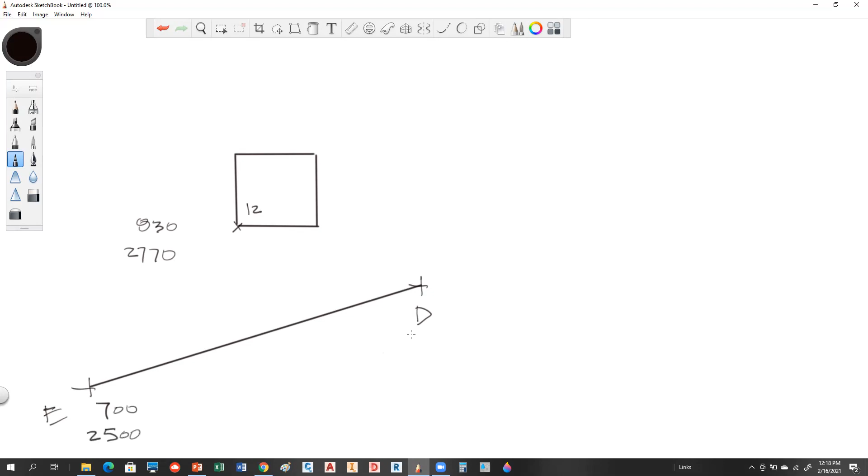And down here, so this is point 12. What we're doing here, this is E and D, this is E, and this is D. So we have 700 northing by 2500 easting, and the D part is 800, 3000. And those are all in terms of northing, easting, northing, easting.

So again, I'm just doing it different than what he's actually showing, but it's the same process, okay? So let's assume we're gonna set up our instrument at E, backsight D, and foresight 12. Like I said, this is not a problem that we're going to have on the test, but this is going through inversing, so it's all good.

It's all good. So what that says, we're going to sit here, we're going to backsight here, and then we're going to turn an angle to E to 12. That's what we need. So we need to inverse that direction. And we also need to know what the information is from E to 12. So we need to get that line also, so we're going to need to inverse that.

So what we would do is first get our backsight. So I would need the latitude from E to D. So that would be the northing of D minus the northing of E. So remember, you're just flipping those, okay? So let's see what we come up with. You guys can calculate it with me. I'm not going to write all that down, but D is 800 and E is 700. So that gives us a positive 100.

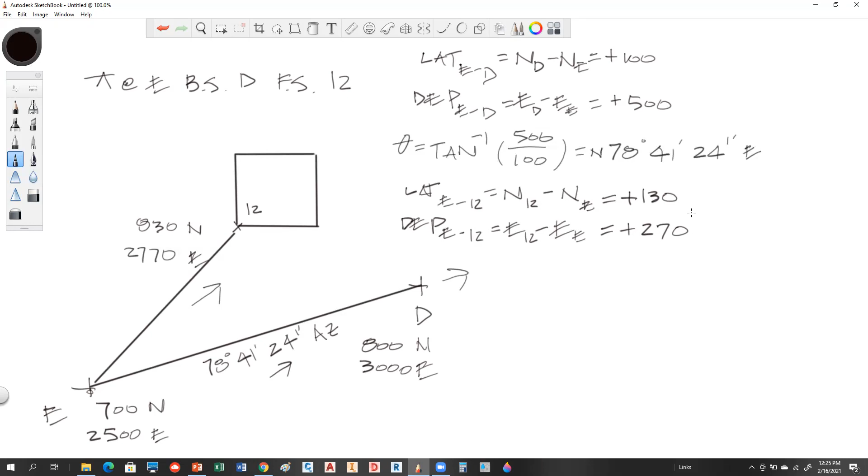Let me just mention something too here. It's not a big deal, but most people in the real world don't use A, B, C's, and D's for their control points, because you're going to run out of control points real quick. You only have 26 letters. So most people use numbers, just so you know.

You would see that. All right, so the inverse tangent direction on this would be an arc tangent of the departure, 270, over the latitude. Now, as you look at this, if north is up, which we're assuming, this bearing has to be less than that bearing because it's going to be closer to north. So if you don't have that right, think about that, because if you flip those numbers, it could be different. Okay, so I'm getting, let's see what I'm getting here, 270.

All right, I'm getting 64 degrees, 17, and it's also 24 seconds. Anybody agreeing with that? Yes. Okay. Now notice what I just said. This number has to be less than this, because again, if we look at north, the angle here is going to be less than the angle to there. So that does make sense. And in terms of an azimuth, this is also the same number, 64 degrees, 17 minutes, and 24 seconds azimuth.

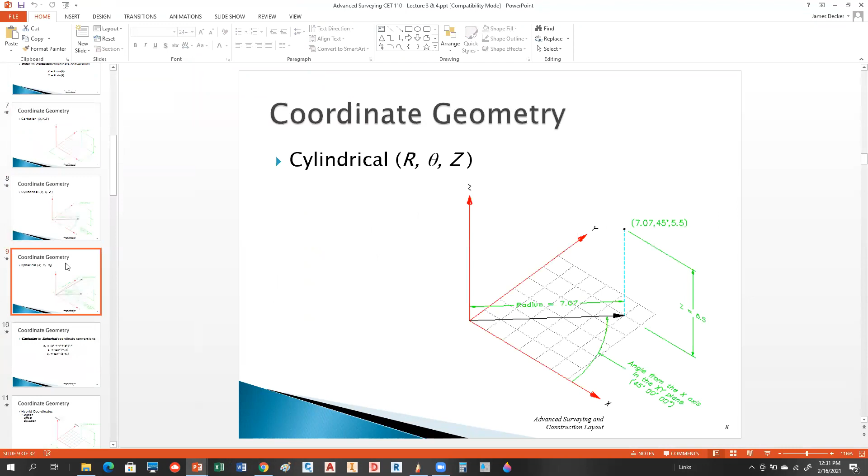Okay. Well, one thing, remember the steps that are involved in any traverse calculation. Let me fire this up real quick. Let's look at some PowerPoint stuff real quick. Maybe that'll answer a question for you. Because I'm not trying to not answer that, but like I said, we went through that on Thursday. So let's see. Give me a sec here. Gotta find it. Okay, so the biggest thing with traverses, maybe it's not in this section. Might have the wrong PowerPoint. Let me grab another one.

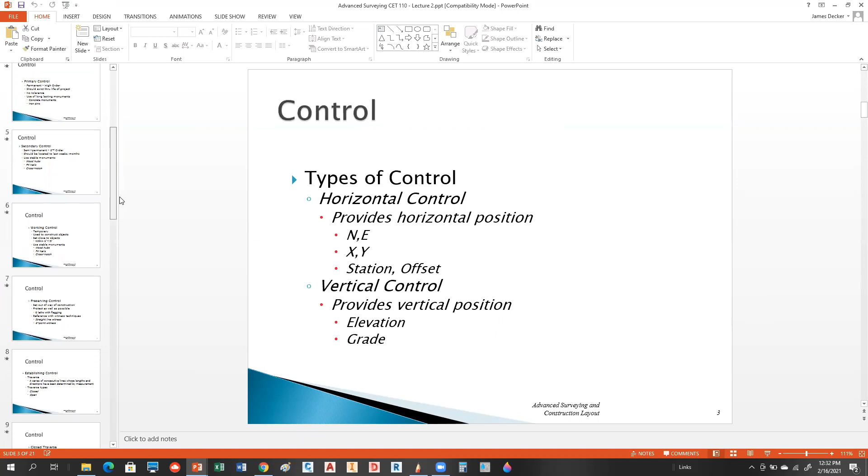Okay, so this one, the biggest thing with traverse closures, just remember the steps, okay? Because the steps really kind of guide you through, and you can use these as handouts. You might want to print this stuff out to have it, particularly this piece right here. So this is showing you the typical steps that you go through in a traverse calculation.

Now I might not give you a traverse where you have to do steps 1, 2, 3, 4, 5, 6. I might bring you in right here and say, okay, I've already done all of this up here. Calculate latitudes and departures and go on. So do keep that in mind. You want to have these steps available to you and know what each step is and what it's referring to, but it may not go from start to finish.

So in a traditional traverse, like the control that we're going to be laying out next week, we would do all of this. We'll balance the angles first, calculate directions, either in azimuth or bearing, calculate latitudes and departures, determine linear misclosure and relative precision, adjust the traverse, and adjust or calculate coordinates. Remember we've got the angle balancing, and some of you didn't do very well on that quiz, so make sure you know how to add angles, because that was probably half the battle.

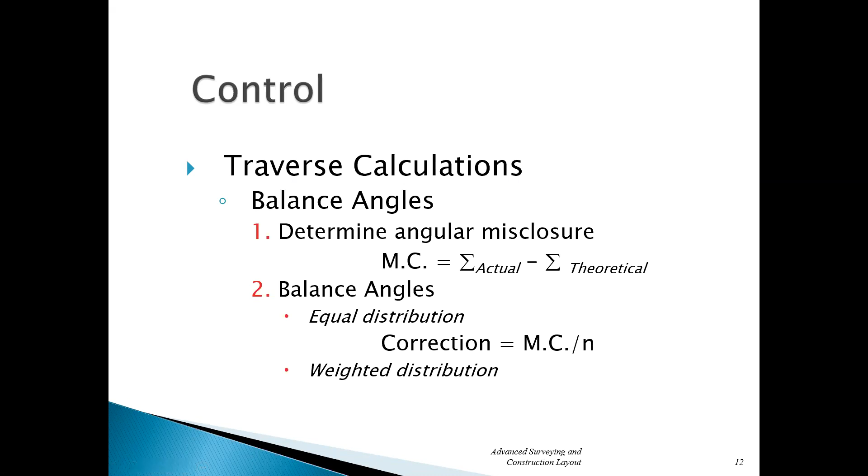And we're going to do an equal distribution. So that's what I said. If you're going to get a misclosure from me on this test, it's going to be something that's going to give you a nice equal number, 2 or 3, 4, whatever. Okay. So that's your first step. Second step, of course, is to calculate traverse directions using azimuths or bearings. So you would be given some initial direction, and then you would have to go with that.

So again, I may have a problem out there that you're just doing something like that very simply. It's probably not going to be a traverse start to finish, and I'll tell you why. Because if you blow one aspect in the beginning, the whole problem's wrong. First time I taught this class, way back when, I did that in a traverse from start to finish, and half the guys couldn't calculate bearings. So, you know, at that point, the whole problem was wrong. So just be focused on that. I'm going to bring you in at different points within the traverse process.

Hopefully at this point, everybody knows how to do bearing and azimuth calculations. Does anybody need to see anything relevant to that? Because I would certainly go over that if there's any issues. We're okay? Yeah, I'm good. And if you choose and you want to use azimuths, you can, unless it's specifically stated, hey, you have to use a bearing. Because remember, the azimuths very, very often are going to make your work a little bit simpler to deal with. But again, that's up to you, unless I specifically say I need this or this in that format, okay?

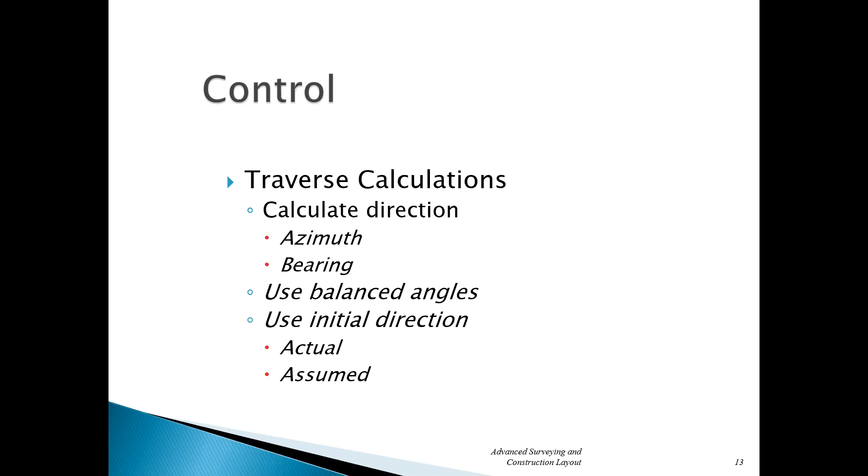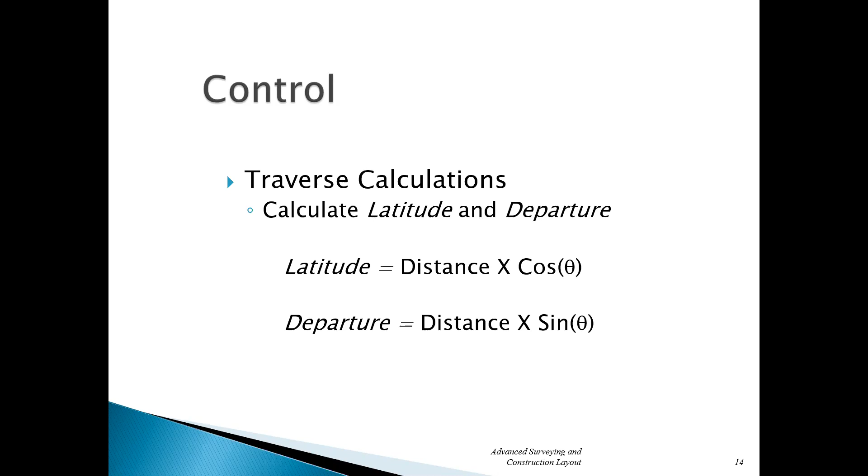So the next step is to do latitudes and departures. So this is the process where you have a known distance and you have a known direction. So in this case, where we're using these equations, remember, latitude is always a cosine relationship. Departure is always a sine. If you flip these guys, you're going to have problems. I haven't seen too much of that going on by anybody right now, but hopefully I won't see it on the test, okay? But remember, this angle, theta, can either be expressed as the bearing angle or the azimuth angle.

You're going to get the right latitude and departure using either one, but the difference is, I think we all know at this point, when you're using a bearing angle, that bearing angle is only going to give you a positive result for your latitude and departure. So at that point, you're going to have to apply the sign based on the quadrant that bearing exists in. The advantage to the azimuth, of course, is that your calculator will calculate it properly, and you will get a proper positive or negative sign based on what the azimuth angle is. So again, just think about that.

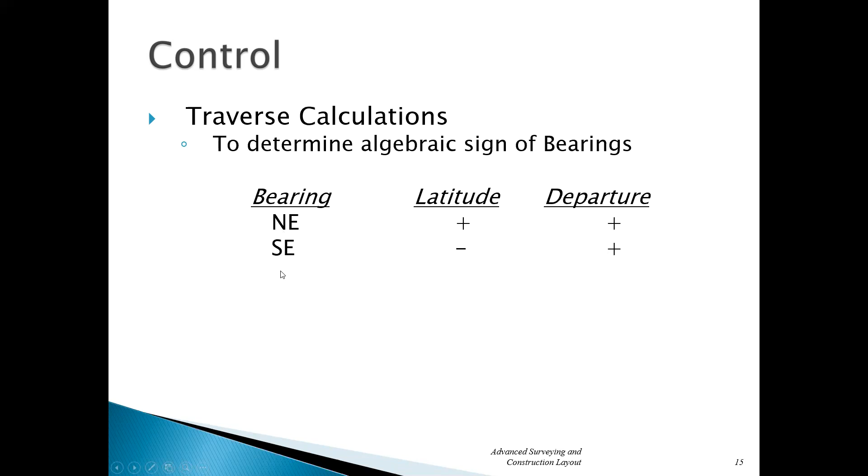If you're using bearings, this is that little chart. Remember, northeast is positive, positive. Southeast would be a negative latitude, positive departure. So again, we're just saying that north and south is positive, negative respectively. And then the same thing with departure is east and west. You have west is negative and east is positive.

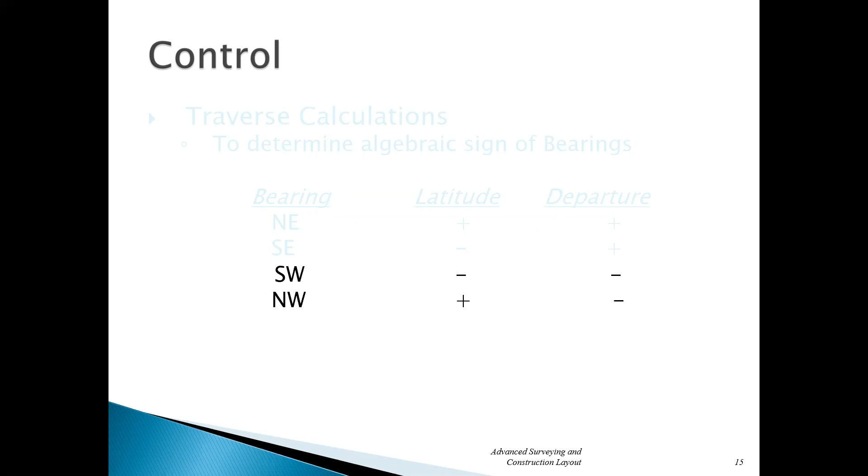All right, so once you do that, this is the next step, calculating linear misclosure and relative precision. So we sum our latitudes, we sum our departures, we do that algebraically, and that's going to give you your error in latitudes, error in departures. And remember, when you do this, if you come up with a really large number, that's also going to be a mistake. Now, I'm going to probably give you something that you can see, that you can adjust, but it's not going to be 5 feet. So if you get something like 5 feet or even 1 foot, you're probably going to be wrong. You need to recheck stuff, okay? But I'm going to give you something. It's not going to be like 0.01 because that's not going to be enough to distribute, okay?

And also make sure that you follow the sign, because the signs are critical when it comes to doing the adjustment itself. So when you sum them up, make sure you're doing it algebraically, okay? Linear misclosure, your error of closure, either way, we express it as the error in latitude squared plus the error in departure squared, square root. So again, you're just using that Pythagorean theorem relationship.

The bearing direction of the error is less critical, okay? But what we've talked about quite a bit, and what you'll find is pretty true, is if the traverse tends to be longer in a north-south direction, you're probably going to have a bearing that's going to be between 0 and 45 degrees, okay? Because it's going to be closer to north. If your traverse tends to be longer in an east-west direction, you're going to have a bearing angle that's going to be between 45 and 90.

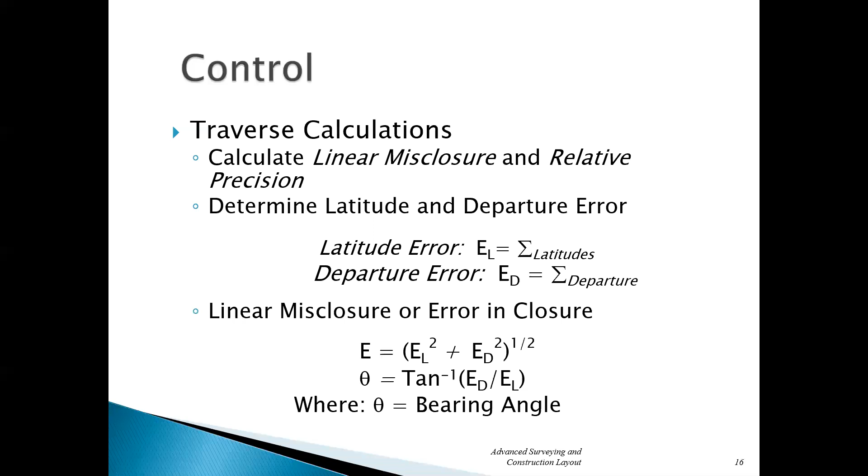So it's showing you which direction it is, and it should make sense because you're traveling longer in one direction than the other. So the error tends to follow with that. And again, it doesn't always work that way, but majority of the time it does, all right? So with this, once we have E, which is the critical component here, then we go and do what's called the relative precision. So remember, that's really defined as your error of closure divided by your perimeter, which if you do that, you get that small number. So you just flip it, 1 over x, or you can just divide perimeter by E.

But what that relates to you is the amount of precision as number 1 in something. So we would say this is a 1 in 16,385. A lot of people would just round that to 16,000, or might call it 16,400. But remember, what this is specifically saying is that for every 16,400 units we travel, we can expect 1 unit plus or minus of error associated with that. And so hopefully everybody realizes that this is not a good precision right here. In fact, it would fail probably in all counts.

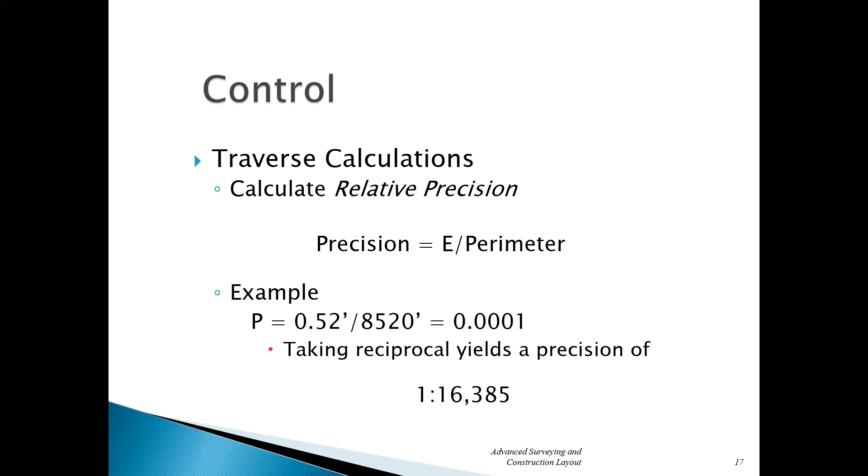I do think state of Ohio in urban surveys is 1 in 20,000. I think rural surveys, farmland, they actually let 1 in 10,000, just because you've got more open ground and everything. So this might be acceptable back in the day, but I wouldn't call this an acceptable precision for any purpose. Okay, so the next thing was the adjustment.

So we talked about 4 rules. We've only considered 1. So you don't need to know anything about the other ones. In fact, I didn't talk about anything other than the transit rule. And what I did relate to you is that the transit rule assumes that you're measuring your angles with a better accuracy than you are your distances. So when you adjust a traverse with a transit rule adjustment, it puts more correction into the distance component, and it keeps the angle pretty much the same.

So the compass rule, what does the compass rule assume? Anybody know? So we said the transit rule assumes that the angles are better than the distances. What's the compass rule doing? Nobody knows? It pretty much assumes that the distances and the angles were pretty much measured with an equal type of accuracy. So in other words, there's nothing better. They're basically the same.

That's pretty standard measurement by today's instrumentation. So when you're using a total station that's a 1-second instrument and an EDM that's built inside of that, you're getting good distances and you're getting good angles, and they're pretty equal. So what the compass rule will do is it actually adjusts both components. So it tweaks the distance a little bit and it tweaks the angle a little bit, and they're pretty much equal. Both things will change though. What you'll find is both will have a little bit of an adjustment placed in them.

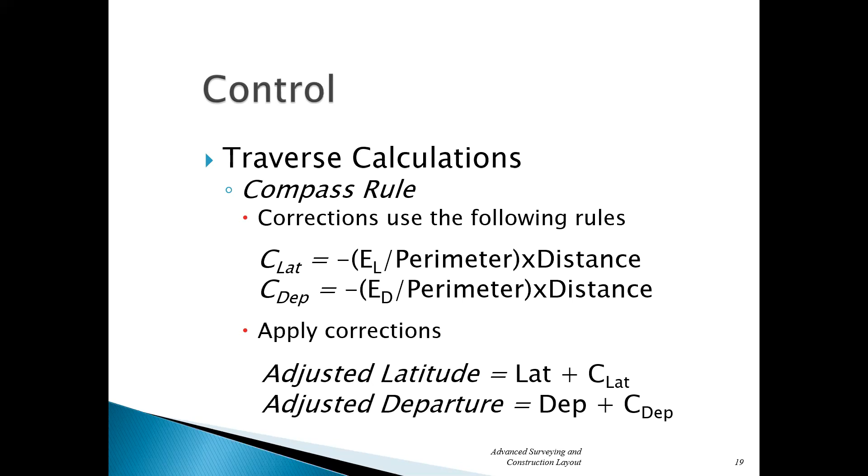So the last step would be calculating coordinates. And basically we're just using this equation that says your point B is going to be equal to the point you're coming from plus the latitude that connects them. And again, you're using algebraic signs here. So if you have a negative coordinate and a negative latitude, you're adding them together. You get a negative coordinate here, but we always are using positive coordinates, so we shouldn't have any negative coordinates. So we really just have to consider the sign of the latitude and the sign of the departure as we add them, okay? So that's kind of the situation that we went through on all of these.

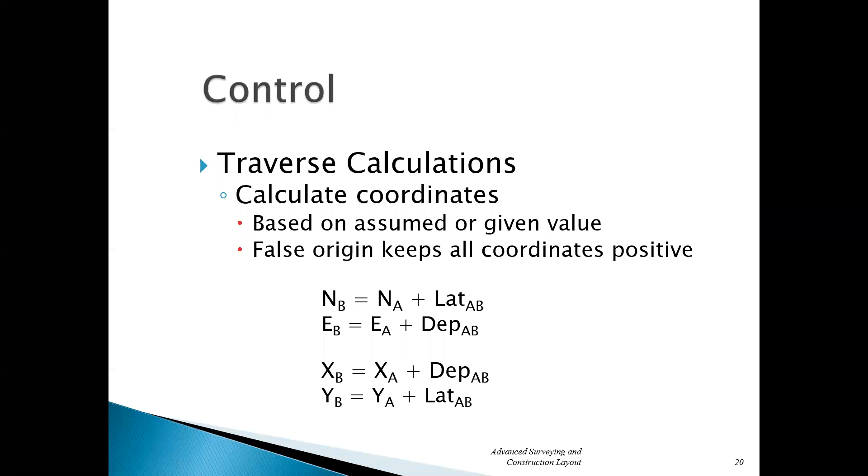And then if you're using X's and Y's, that's what you would use. Notice you're flipping your departure and your latitudes. We're not going to be using X's and Y's. Everything's going to be northing and easting. That's what layout people use by and large, and that's all we've been talking about. So don't worry about X's and Y's. All right, that's kind of a review.

Josh, is there still something you would like to see based on any of that? Well, maybe not. Okay. All right. Does anybody want to see anything else?

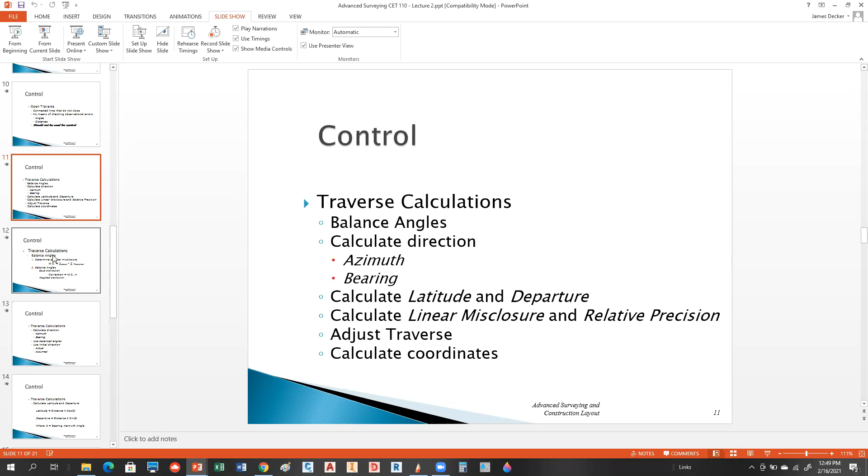This little section on sheet 2 is pretty important. So make sure you have this one available. Let's go to the sheet. Oops, that's the wrong one. Okay, close that one. Let's see.

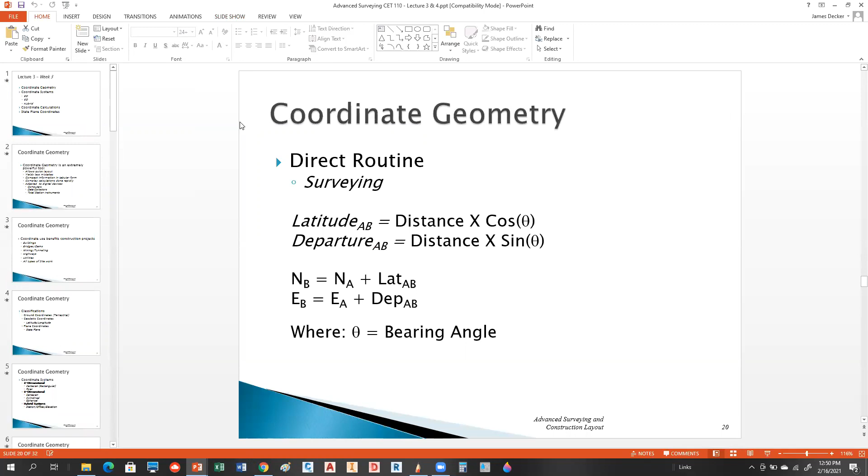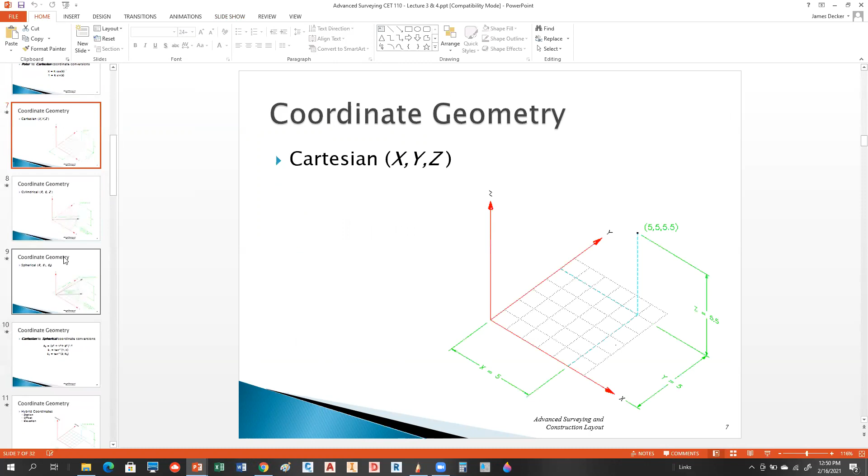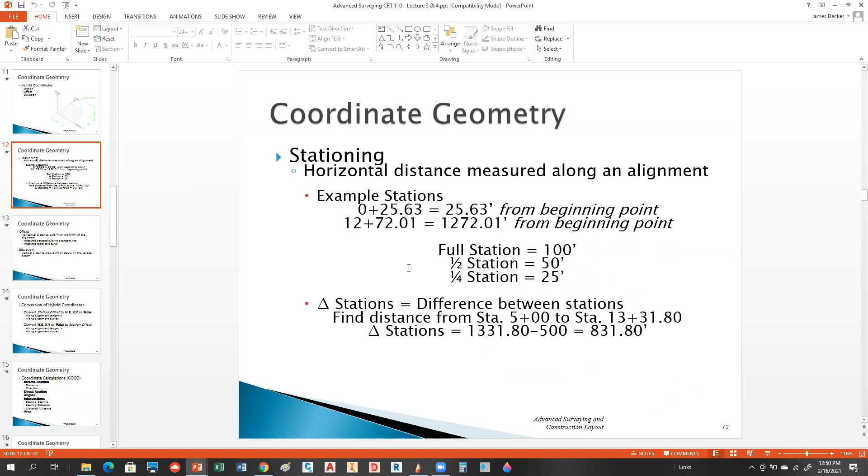Okay, so from the coordinate geometry stuff that we got into, let me just give you a couple of key equations here. By the way, any coordinates that you see are going to be rectangular coordinates or polar coordinates. You're not going to be dealing with stations type stuff. When we get into highway stuff, linear alignment, we're going to see this, but we don't have to worry about this. This was just informational for now. It's not going to be as important. All right, this is important stuff. Let's just make sure we go through this.

So you will be looking at the different types of COGO calculations, which we just did an example from, but primarily the inverse routine, which allows us to get distance and direction, and the direct routine, which allows you to take a known distance in a known direction, and then with a known starting point get an ending point, or a coordinate value. And I just went through an angle concept.

I didn't go through any kind of intersection stuff with you. These are powerful types of things, but we don't have time to mess with those. So we're not going to get into that. And I did kind of show you an area problem the other day, but again, I'm not going to worry about that right now in this test.

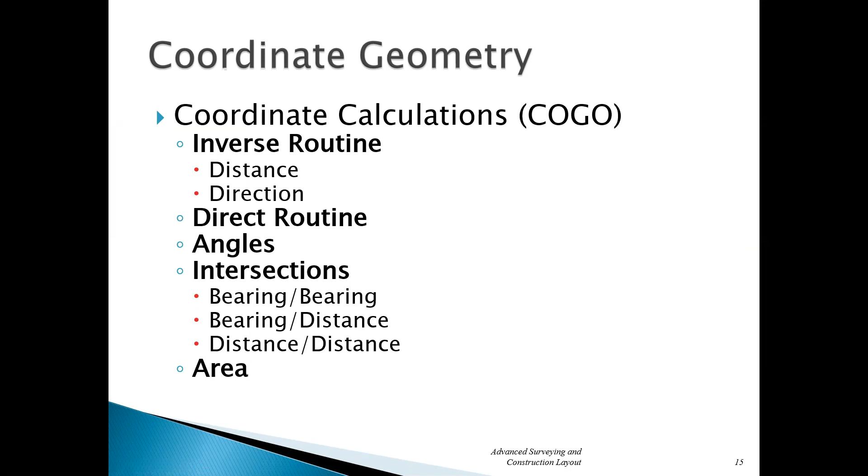So in this piece right here, inversing direction is important. Now I gave it to you in terms of analytic geometry, but we really are going to be utilizing the surveying kind of concept. So this is your inversing direction. And again, hopefully everybody has memorized this by now. It's your departure over your latitude, and this is always a bearing angle.

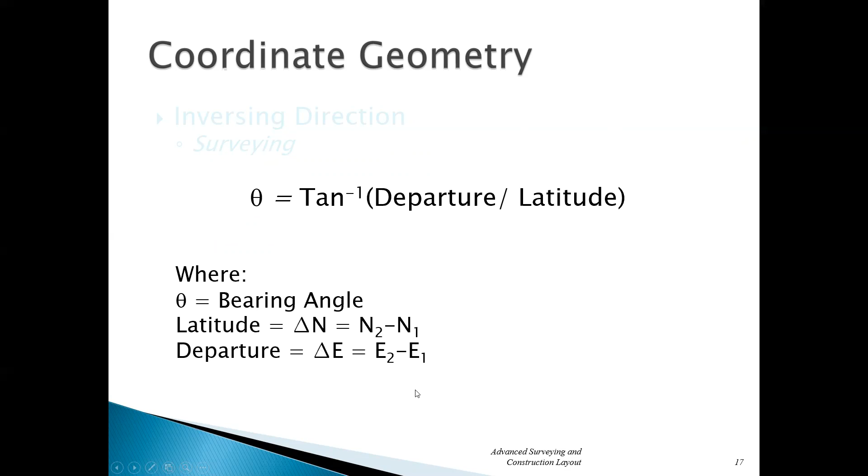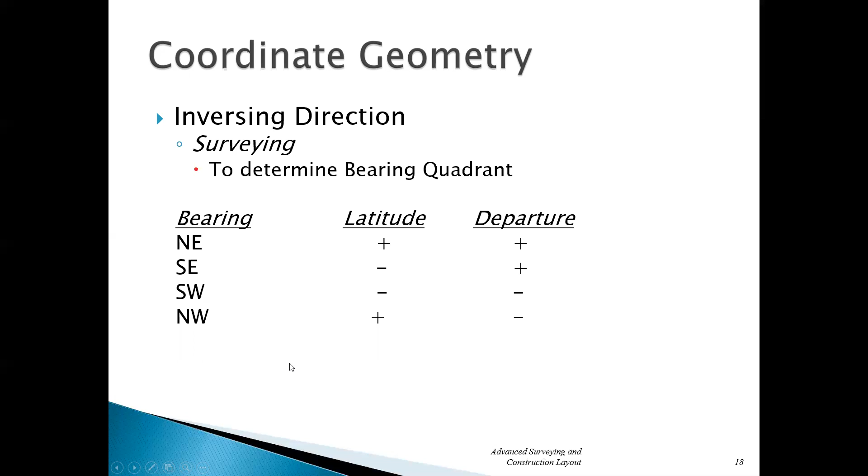And of course, latitude going 1 to 2 is going to be 2 minus 1. Another way of expressing that is delta northing, delta easting. But you need to make sure what you're saying with that, 1 to 2 or 2 to 1. So that's your inverse direction. Inversing distance, of course, that comes into play also. Memorize that little chart if you don't already know that. That's important for inversing.

Distance is very simple, okay? Distance is just your latitude squared plus your departure squared, square root. The beauty of distance is whether you flip your latitudes and your departures right or wrong, you're always going to get the right answer, because when you square a negative number, it's always going to become positive anyway. So if you inversed in the wrong direction, the distance is still going to be right, but for the direction itself, that's going to kill you. So you got to be careful with that, okay?

I think out of this sheet, there's other things here. There's other issues here. Okay, here's the direct routine. So when you're doing a direct routine, you can get a latitude from any point to any other point by taking the distance times the cosine of the direction. Okay, so we've already seen this. Again, hopefully this is starting to really be cemented in everybody. Okay, so just have this available too.

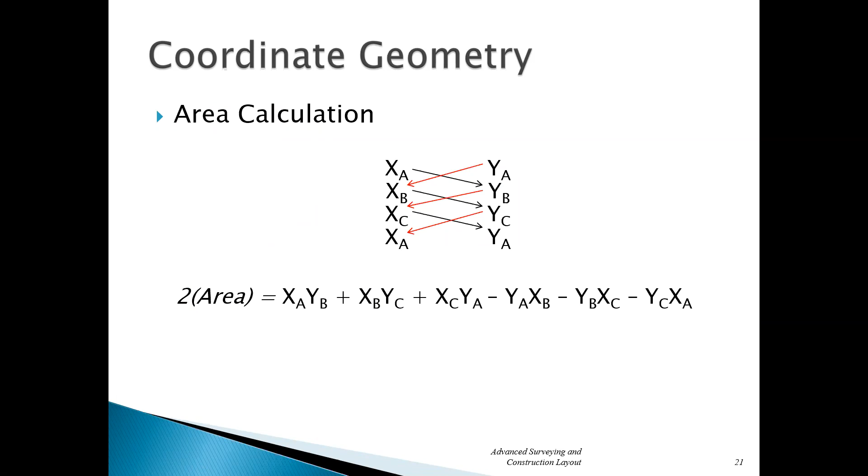The things we didn't do on this, area calculation, I kind of talked about that the other day, but don't worry about that for this test. That's not going to be important for it. Okay. All right, so didn't talk about state plane. Maybe I'll talk about that a little bit next week, but I don't really want to get into that right now, because that's going to just muddy the waters really for what we need to get into. All right, so that's kind of it for the test.

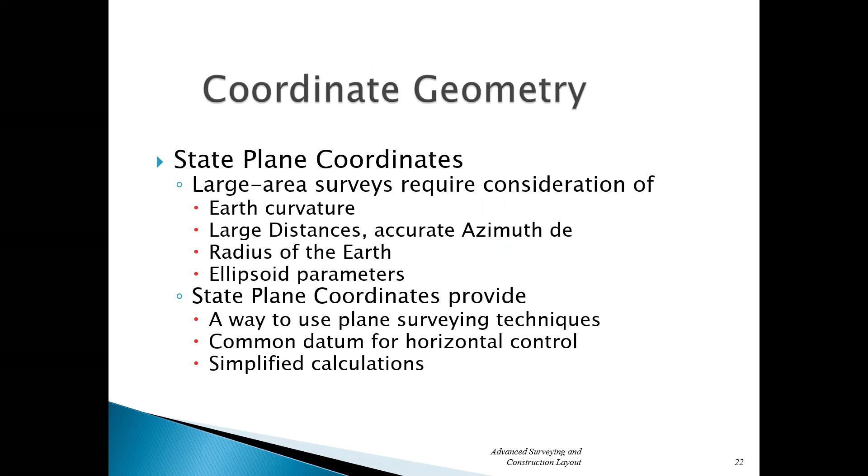So any questions at anything anybody can think of right now? I'm good. Okay.

All right, so I do want to introduce a couple of things we can start thinking about now. This would be stuff that we'll be starting to see in the next couple of weeks. So again, don't worry about this stuff for the test. And I did open up week folder 6. So if you guys want to look along at this, you should find your 6th folder open. And in there you have these lecture handouts, which I'm just going to kind of go through.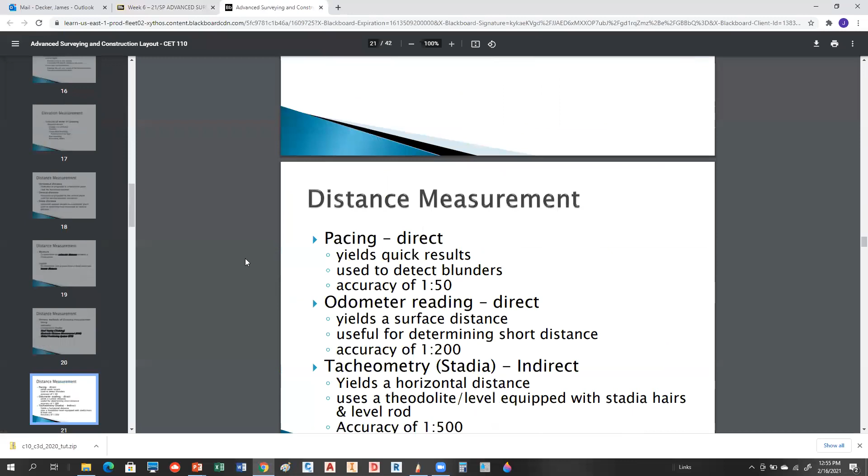So these are going to start to talk about leveling. First, we're going to talk about leveling, and I'm probably going to get not too very far into this. But we're going to start to use this again, and then distance measurement, and then ultimately angle measurement. Okay, so let me see how far I get with this. If not, I'll pick up with this next week. So I just want to not waste the time today.

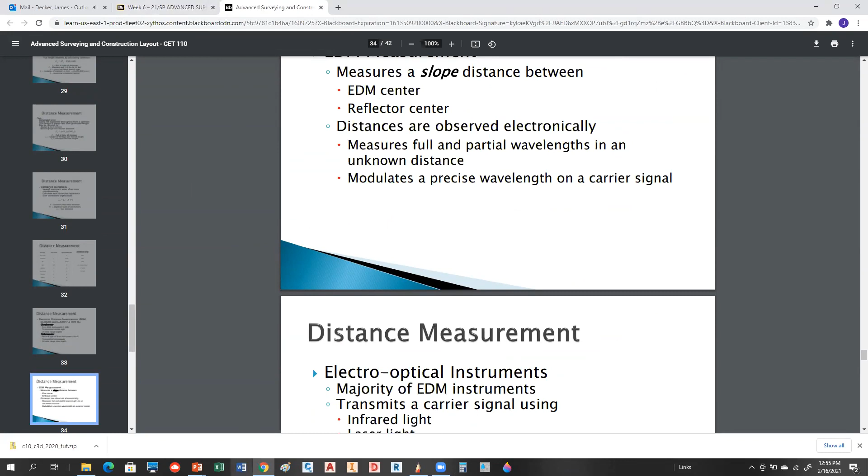So let me go to my PowerPoints. I'm going to open up my PowerPoint slides. Nope, wrong one. Okay, we'll do a little bit here, and then I'll stop the recording after a little bit, and we'll get started. So let's see. All right.

So, this is technically what we're going to start to do as we do more layout. So it's kind of broken down into 3 major things that this section is talking about. We're going to talk about elevation measurement. We're going to talk about distance measurement, and we're going to talk about angle measurement. So you've done all of these things before, and I think the first week alluded to this, but I want to pick up a little bit more specifically with this.

Okay, so leveling techniques: first of all, when you're talking about leveling, what you're talking about is determining an elevation above or below what we call a datum. And anybody tell me what a datum is? Anybody know what a datum is? Nobody ever heard that term?

Nobody knows what a datum is? Wow. Okay. A datum is just a reference surface. So when we talk about elevations or leveling, what do you hear very often? What is your datum? I know you've heard this term before. In fact, I think we've mentioned it before.

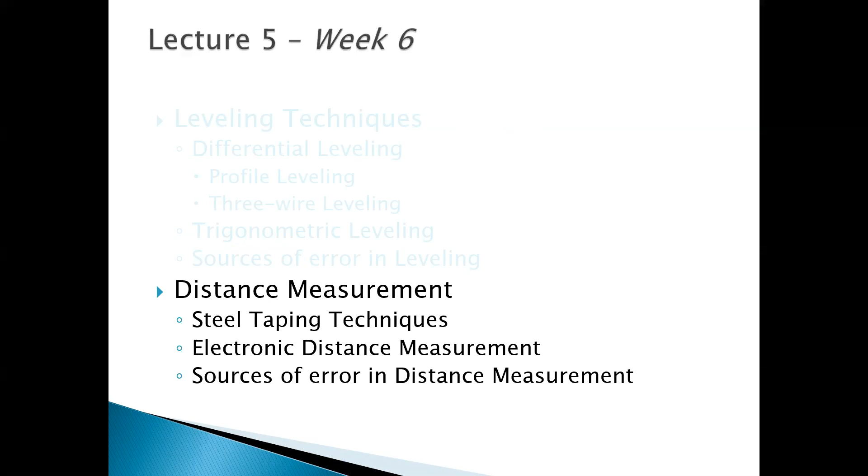Okay, so in distance measuring, we're going to talk about steel taping techniques, electronic distance measurement, and sources of error. And I don't know how far I'm going to get in this today, so we may just pick up with this next Tuesday. And so for elevation measurement, there should have been angles on there. Oh well. Okay, so elevation is another way of expressing what we call vertical distance.

And vertical distance is the distance that would be measured along a vertical line. So if you remember, in the very first days when I started, I gave you some basic definitions, and one was a vertical line, and that's the line that follows the direction of gravity at a point. So if you take a plumb bob and suspend it freely, the string itself is generating a vertical line for you. Well, that's going to be important next Thursday, because we're going to be utilizing plumb bobs to get sights, backsight and foresight.

But when you're talking about elevation, if you're saying vertical distance, you're basically measuring that distance along that plumb bob string, if you will. That's your vertical distance. So there's three primary types of leveling, as we said: steel taping, sometimes referred to as chaining, that's the old term, differential leveling, and trigonometric leveling.

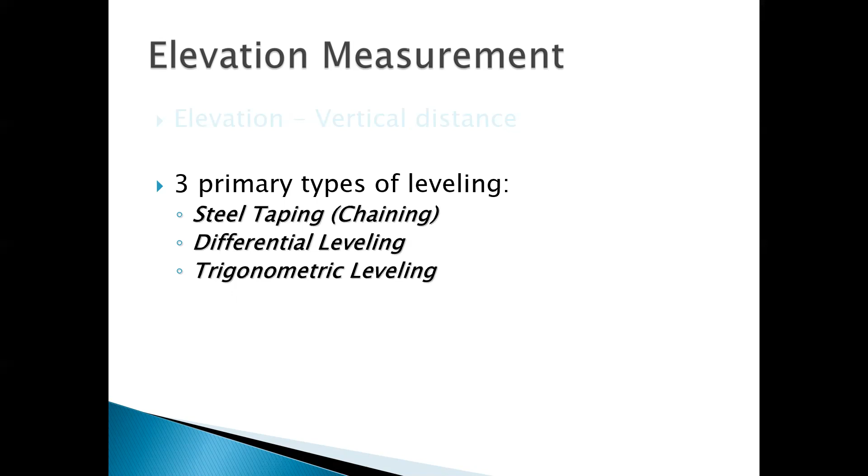Anybody know why they use the term chain for steel taping? Anybody know that answer? Did they used to use chains? They absolutely did. In the original days of surveying, we're talking late 1700s into the early 1800s, they did use a chain, and it was broken down into what were called links. Once the steel tape was developed, probably early in the 1800s, it displaced that completely. The federal government still uses the chain as the unit of measurement, though, for all the stuff they do. I think I've mentioned that before too.

So if you're steel taping, you're directly measuring a vertical distance. So you're reading it directly.

It's really a good method. The thing about it, though, is that you have to make sure that the steel tape is being held vertically. So if you are out of the vertical line, in other words, if you're doing a diagonal distance, you're not getting a true vertical distance. So you've got to be careful.

But like I said, if you had 5 floors up, and you wanted to get an elevation up to the 5th floor on a building that was being constructed, you could theoretically just drop that steel tape along a steel column and measure it very precisely, because that steel column should be plumb. In other words, parallel with the vertical line, and read it right on it. So that's a great method.

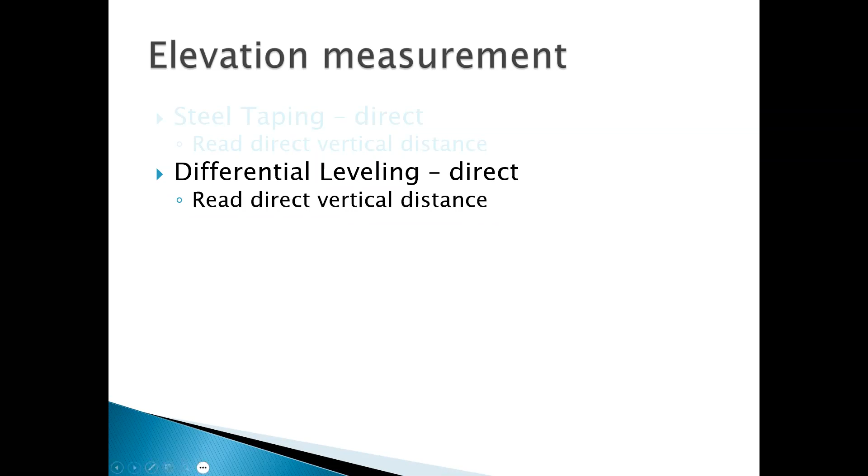Differential leveling is direct, and what you're doing is reading a direct vertical distance in this technique. So let me show you a picture here. Again, just a real quick schematic of what we're looking at when we talk about this. You use an instrument called a level. We typically use what's called an automatic level. So let's say your ground line here, you have your automatic level set up. That's just a crude automatic level. And I've got a tripod leg here and a tripod leg here. When you level this thing up, what you're getting is a horizontal line of sight.

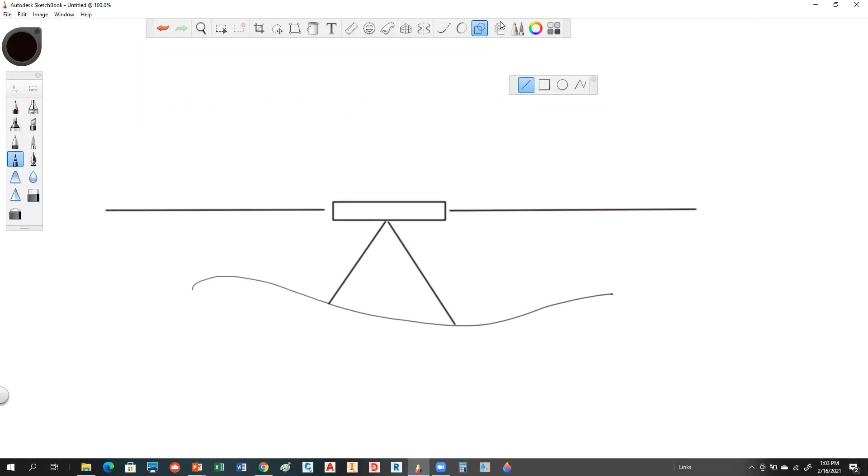And you have a known point, and you put a rod, a level rod, here, and you have an unknown point here. Place that rod over here. So what you're doing in this method, you're reading this distance, which is called your back sight, first. So if I know this elevation here, I'm taking my back sight and adding it to my elevation. So your elevation plus your back sight, and that's again just a vertical distance right there, equals this line of sight here, which we call my HI, which stands for height of instrument. So anywhere I turn that scope, basically I'm looking at the same elevation.

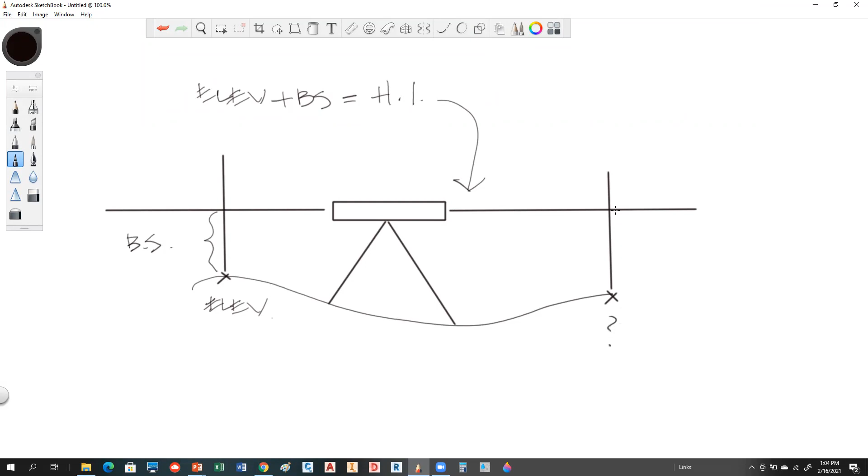And then if I get to this unknown point here, I'm going to read this rod intercept, which we refer to as our foresight. And so we're going to take the HI minus the foresight, and that's going to give me the elevation of that point down there. This is differential leveling in a nutshell, and it takes two equations. HI is equal to back sight plus elevation of known point. Elevation of unknown point is going to be equal to the HI minus the foresight.

So you guys have all used this, and these instruments are so cool because when you level them up, they're real easy to level. You don't have to worry about being over a point. So it doesn't matter where we are here. What we do try to do, though, is keep the distance here and here balanced. Okay, so we would like that to be the same number, which you can see isn't true in my case. Why is that critical? Does anybody know why that could be an important thing?

It has to do with errors associated with that instrument. So if you are closer in one direction than you are in the other, if this thing's slightly out of level, the amount of error here will be less than the error here. So if you keep them balanced, you'll have the same amount of error, and because one is a plus and one is a minus, they cancel.

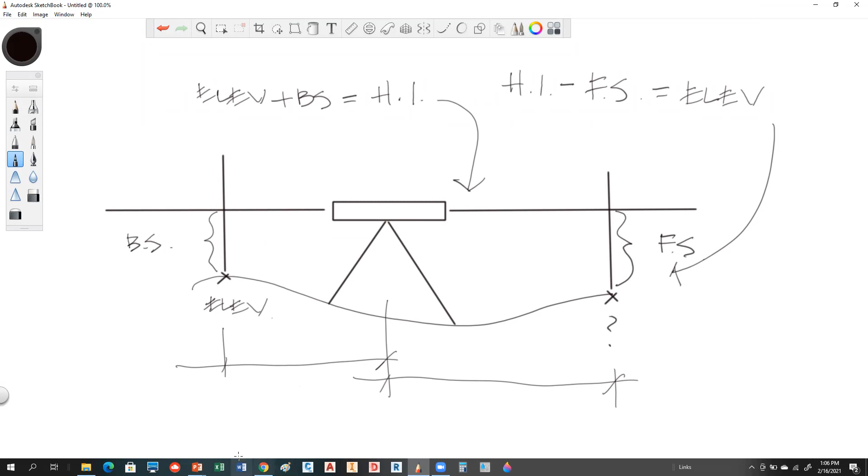It's kind of like that concept I was talking to you guys about on Thursday, double centering, where we flop the scope when we turn angles; it gets out that scope eccentricity. Well, keeping these guys balanced basically does the same thing. So it negates or gets rid of any error that you have associated with your level or your setup. That's a really good thing to know how to do. A little bit harder to do than it seems while you're out there.

Oops, see, didn't think. All right.

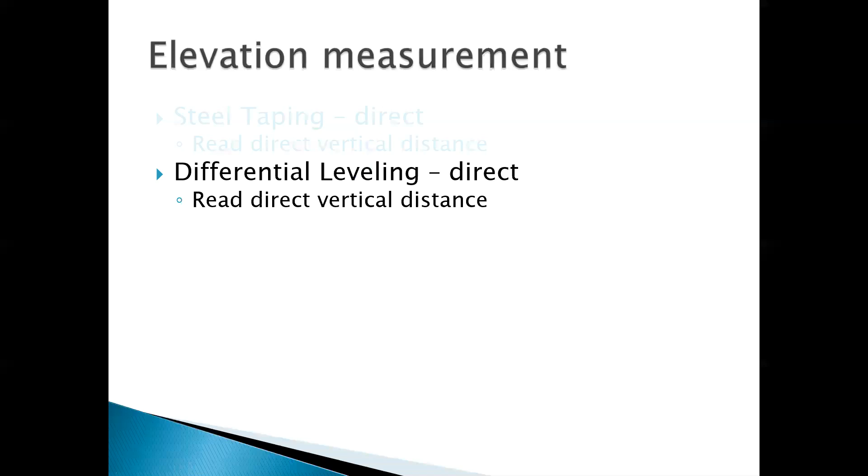So that's differential leveling. Differential leveling can occur either by doing what's called running a loop or running a line of levels. And then you can do a process called profile leveling and then three-wire leveling. So they're all differential techniques. They use the same concept, though. They use exactly what I just showed you. You add backsight to elevation and you subtract the foresight. It works all the same way. The difference is, if we're running a loop versus running a line of levels, how that proceeds.

We're going to be doing lots of loops while we're out there, but just to show you real quickly, if you are looking down, like say from an airplane, and you have a point here and a point here and a point here, what you would do is set your level up between your points, take a back sight, take a foresight.

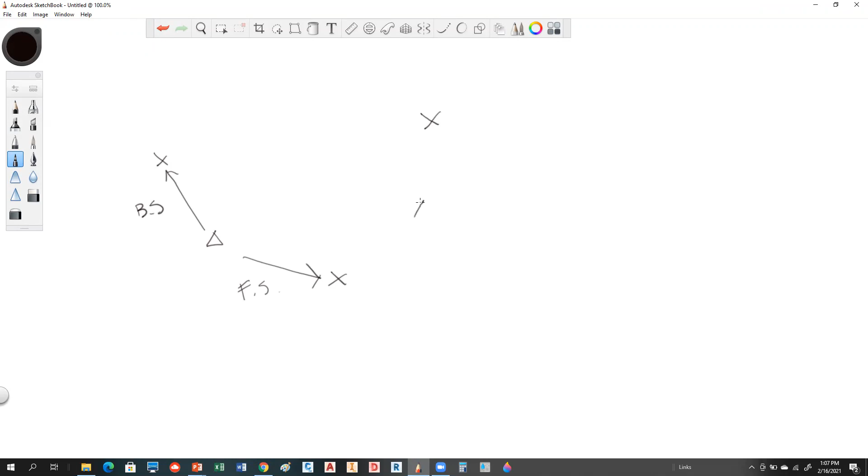So that basically gives this elevation, it transfers it to here essentially. Pick up your instrument, take another back sight, and another foresight. And then I'm going to pick my instrument up one more time, do the same thing. Back sight, foresight.

And this is what we call a loop or a closed loop. So it's just like a traverse. The beauty of that is that by doing that, you're getting a check. Because if we start at elevation 800, as we come around, we have to end back at 800. And if we are higher than that or lower than that, we have what's called a loop misclosure. So we use the concept of misclosure in elevations and leveling just like we do in traverses. Okay, so that's called a loop.

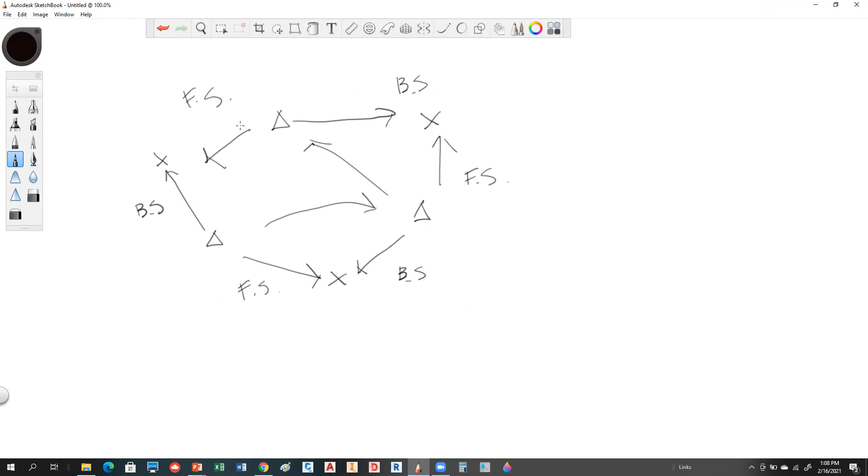Now, if you contrast that with running a line of levels, it's a little different. What you're doing in this sense, you're saying, I have a benchmark here that's got a known elevation on it. So that's a good benchmark, and somewhere down the road, maybe 5-6 miles, I have another benchmark that's got good elevation on it. So what I do is I set up my level, back sight, foresight, set up another level, back sight, foresight, do it again, and do it again.

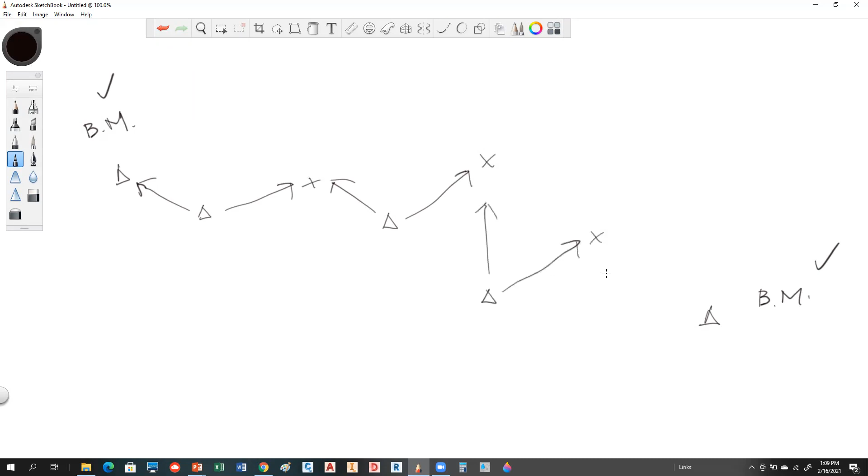So what we end up doing is we have a starting benchmark, we have an ending benchmark, we still have a loop essentially, as long as this benchmark and this benchmark are in the same system. If they're not in the same system, then you're an open loop, it's not closed. But if these are in the same system, this is a really good way of doing this. And like I said, if this was a 5-mile run, you don't want to go 5 miles back to loop it back. You could, but if you conveniently have two benchmarks, you can start at one, tie into the other. This is called running a line of levels. So this is a good method.

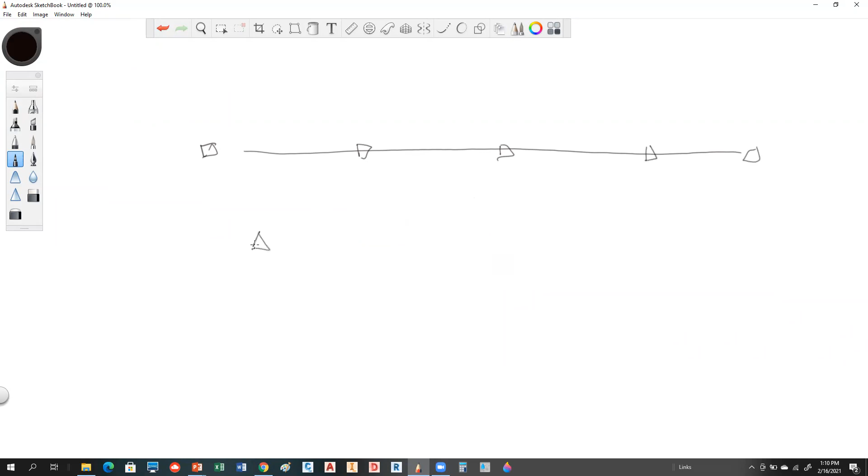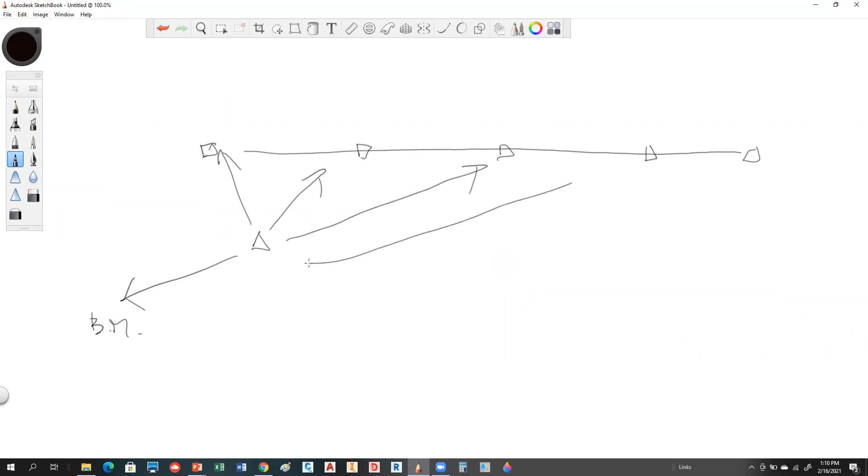The profile leveling, which we're going to also use quite a bit, I'm sure you guys remember that. What this allows you to do is if you've got, let's say, stakes along an alignment, let's say this is like a back of curb, and you need to get elevations on all of these guys. You set your level up, hit your benchmark, get your HI, and then you shoot, and you shoot, and you shoot, and you shoot. Notice I'm not picking up. I'm going to get to a point where I need to pick up, and I can continue. This keeps me from setting up my level at every point, especially if these are only 25 feet.

Now the problem is that this shot and this shot are considered side shots, so there's no check in the quality of these, only the ones that are part of the loop. So there would be a check here, and then you continue. But we do this profile concept because it's quick, and it's a lot less setups. Yes, you can make mistakes, and certainly I've made plenty of mistakes. So that's not necessarily foolproof. So that's how that would work, though. And we're going to be utilizing that process quite a bit.

Three-wire leveling is a method where, I know you guys have all done leveling, so you know what I'm talking about. When you look through the level, you have crosshairs, and you usually read the middle crosshair. What three-wire leveling allows you to do is there's a little upper hair and a lower hair on that. You read all three of those. And by doing that, when you take the three of them, add them together, and divide by 3, it should equal the middle reading. So it keeps you from making mistakes.

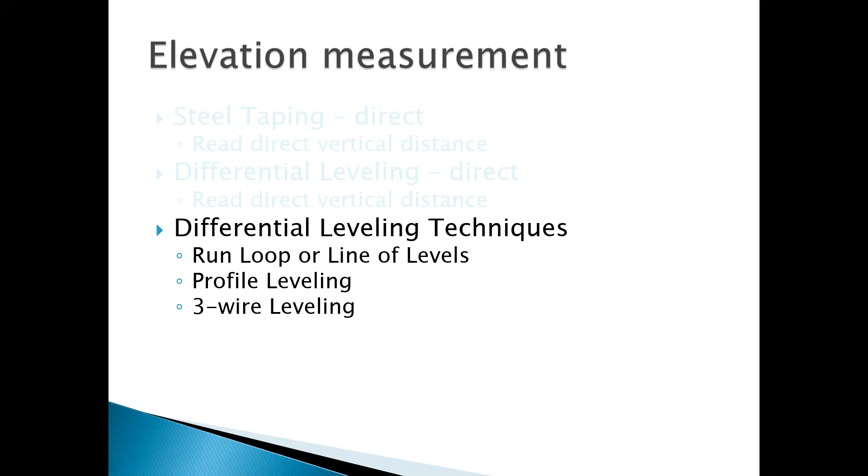So this is just a technique that's really good for running control, and it keeps you from making any reading mistakes on your levels. I think you guys are going to find out once we start doing levels. Leveling, it's actually very easy, but it seems to be one of the harder things people do at first. Just saying.

All right, so the typical differential leveling equipment that we'll be utilizing is an automatic level. That's what we're going to be utilizing. They also have what are called tilting levels, and the newer levels are digital levels, which are really cool because they have a rod that's basically like a barcode, and it just reads all the information, so you don't even have to read anything.

But we'll be using little automatic levels, which are great. They work really well. You have a tripod, you have a level rod, couple different types of level rods. The ones we're using is called a Philadelphia rod. I don't know where it got that name, but that's the one we use, where it goes up to like 14 feet.

A Lenker rod, they're kind of cool. They're used in construction. They have a face that actually moves, and they're a little bit hard to adjust. I have actually some at college. We probably won't be utilizing them. We'll be utilizing the Philadelphia rod primarily.

We have a hand level and a rod level. So the rod level is a little level bubble that you place next to the rod, hold it with the rod, and it allows you to keep that rod vertical, in a vertical position. Without that, you could be leaning it in slope direction, and so what you're doing is getting a false reading by doing that.

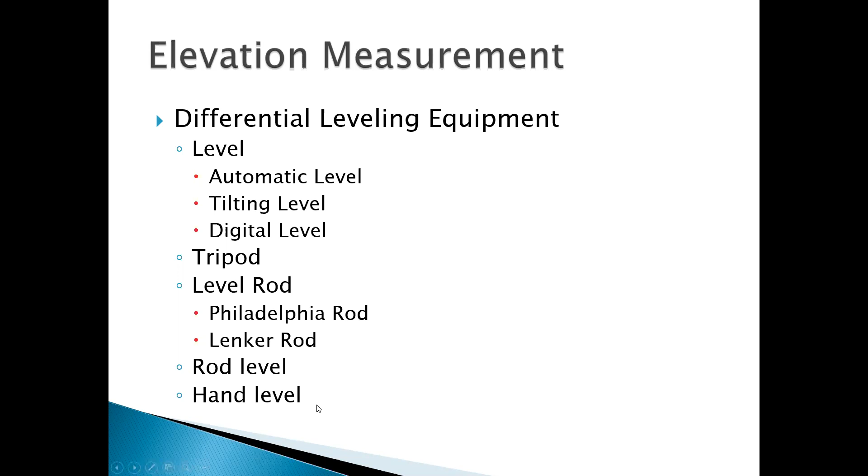Okay, so differential leveling, some beautiful things about it. It's a direct technique. It's used where high accuracy is desired, and it's a very quick method. Once you learn it, it's real easy. All you're doing is measuring backsight and foresight readings. That's it. And then setting up the level, as I said, you can place it anywhere. Leveling it up is real quick.

Now you're going to find on next Thursday, if you haven't leveled up a theodolite in a while, it's going to be a pain to do, because you have to have 2 things happen when you're doing a theodolite. You have a very, very sensitive level vial that you're dealing with, and you have to get that thing over a point specifically. So if you're not over the point, or you're not level, or both, when you're turning angles and getting distances, everything's not right.

With a level, you don't have to be that good about it. You can set it up anywhere, and you can level it up quickly, because inside the instrument there's actually a prism that is suspended by Teflon wires that is free to swing, and you don't have to be perfectly level, and it'll still give you a level reading. So it's a really beautiful process, the way it works.

Okay, so the equations, we already talked about this. You determine your HI based on any elevation value that you're at. So you take your elevation plus your backsight reading, and that gets you your HI, your height of instrument, and your elevation of any other point from that is going to be your HI minus your foresight reading. So 2 equations, very simple, easy to use. Although notes tend to be a little difficult for some people. So we'll take a look at that.

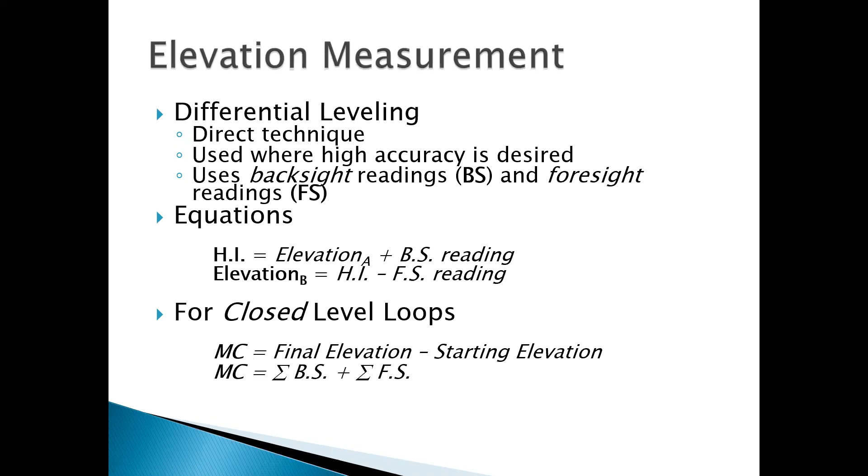Okay, so you guys should be aware of this. Now we're going to be doing a lot of elevations once we get out there. Not on this first lab, but we're going to be doing it on every other lab. We're always going to have it. So this is a typical type of differential level notes that you've seen. You have a station column, which is just an ID column of what you're shooting. There's your backsight column, your HI column, your foresight column.

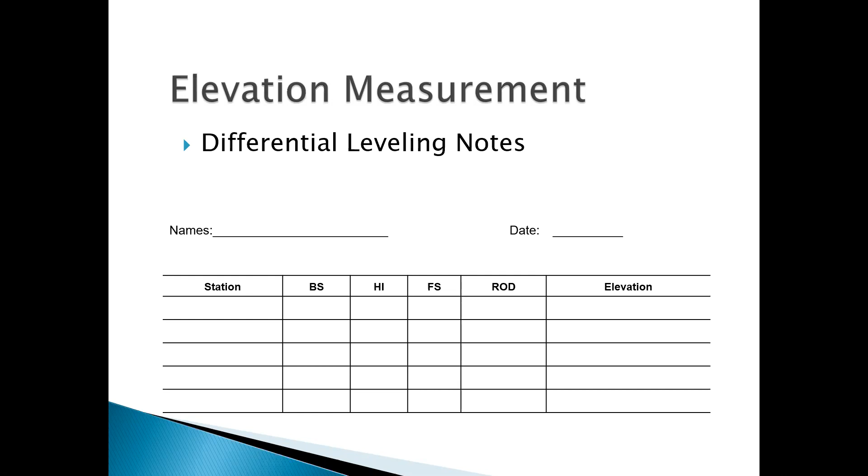And the rod column is only used if you have profile leveling. So if you're engaged in profile leveling, you'll use that rod column. If you're not, we just ignore it. Elevation, of course, is the elevation of the point. So what I'm looking at here is primarily just backsight, HI and foresight. Now, different people do this differently. I do it a very specific way, and I think your author does it a little differently maybe, but in general, we're all doing it the same way. It's almost like a checkbook, if you've got a checking account. I'll show you what I mean by that.

So here's an example. We started at benchmark A, and we took a reading at benchmark A of 6.77. Benchmark A has an elevation of 528. Now these notes right here are already complete. As you're running these things, it's a lot different process, because it's going to be a little bit harder as you're writing the numbers down. But what I'm doing here is, to get the HI, I'm essentially taking that 528 elevation, adding the 6.77 to it, and putting it right in the HI column.

And typically what I'll do is, to help me, I'll put a plus where it says backsight, and I'll put a negative where it says foresight. That keeps me where I need to be. Now the other thing I do, because the first shot that you take in the set of notes is your backsight, there's no foresight. A lot of times I'll put a line right through the foresight column so that I don't deal with that. Let's see, does that allow me? Yeah. So I'll put a line right there, and I'll put a negative sign here, and a positive here, so that I know what's going on.

And then we're going to, well, actually, we haven't picked up the instrument. We're going to take a reading on the foresight. So that was the first backsight reading. This is the first foresight reading. So what you do is take this elevation minus that, and you write it here, in that point. You picked up the instrument, put it at what's called a new TP, which stands for turning point. You re-level it, and you take a backsight on the last point that you were sitting at, and then you take that elevation, that 530.54, plus the 7.45, and you get the new HI. So ultimately, this is a closed loop, because we started here at A, and we ended here at A.

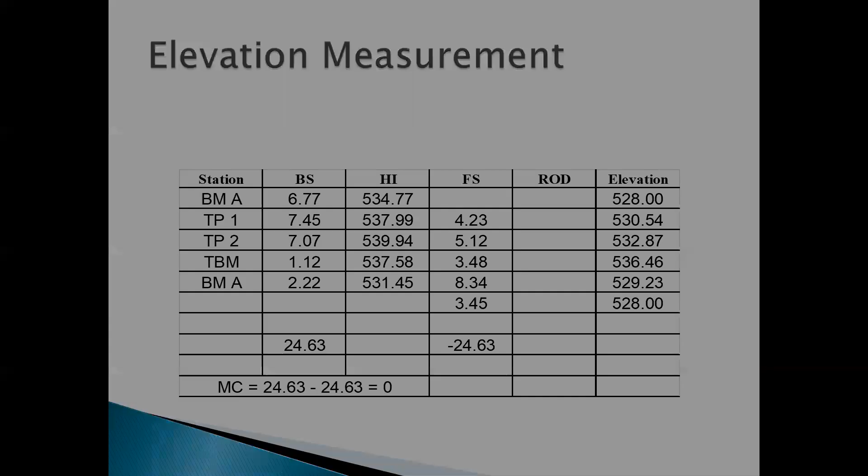So, profile leveling is a type of differential leveling. Like I said, it's used to define elevations, usually along some kind of line, like back of curb, center lines, those kind of things. But you don't want to set up every time. If I've got a stake out there every 25 feet, I don't want to set up every time I'm between two of those. If I have a mile of pavement and I've got stakes every 25 feet in a mile, I'm going to be out there all day.

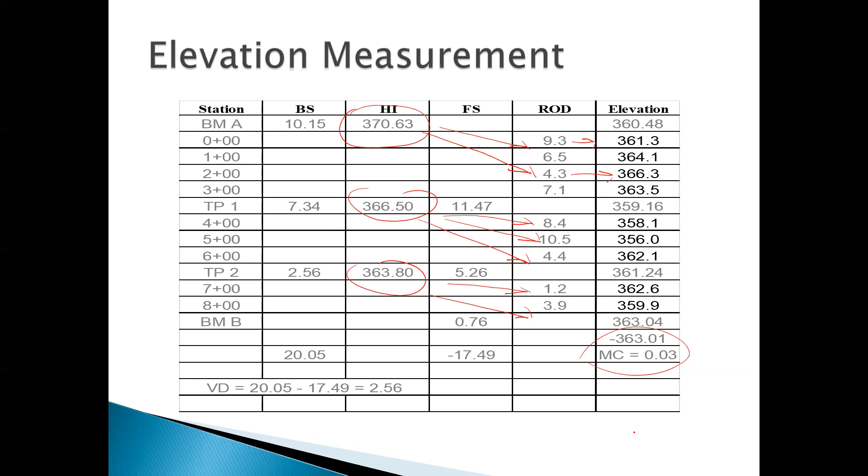So if you're doing profile level notes, what I always recommend you do first is ignore these numbers right here and just go through the loop. Do your elevation, HI, elevation, HI, elevation, and your misclosure. Always proof your misclosure before you do your rod shots, because otherwise you can get really messed up. All right, and we're gonna see this process as we get out there. We're gonna be doing this a lot.

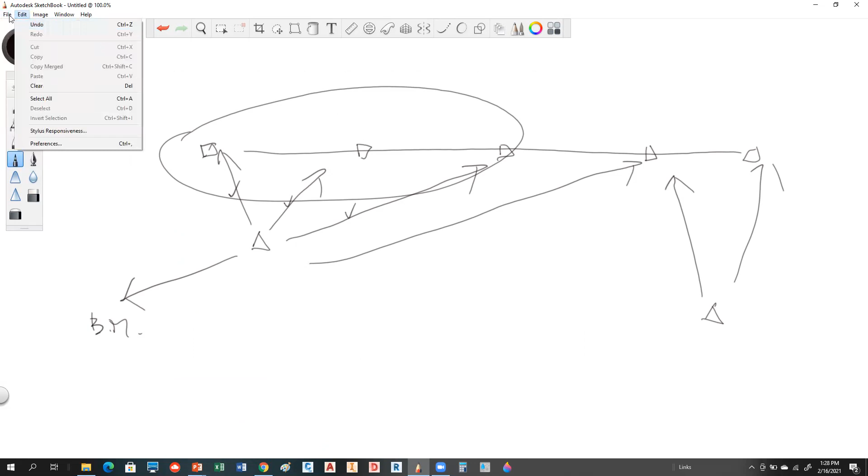Okay. All right, so 3-wire leveling, as we said, it's just a method of differential leveling. Basically what you're doing is you're reading your upper, middle, and lower crosshairs. So it's very useful for precise work. Let me draw a little picture here, because I know you guys have seen this before, but we'll see this when we get out there. If you're looking through a traditional level, what I'll see is crosshairs.

So you have a vertical crosshair, and right in the middle of your scope, you usually have a horizontal crosshair. It's usually bigger, and then above you'll have a little smaller crosshair here, and another smaller crosshair here. And this is the one you traditionally read. This is your middle crosshair. So when you're doing 3-wire leveling, you're going to read this guy, and this guy. So this is your upper crosshair. This is your lower crosshair. And this is your middle crosshair.

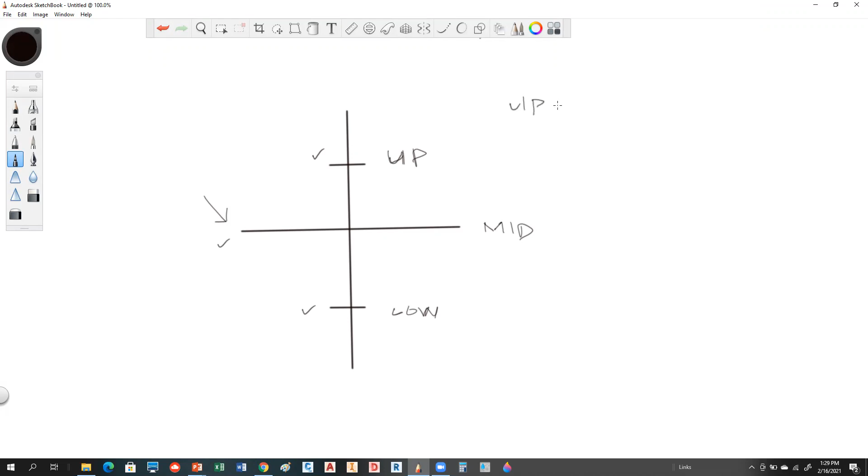So what's cool about 3-wire leveling is if you take your upper crosshair plus your middle crosshair reading plus your lower crosshair reading, and you divide it by 3, it should approximately be your middle crosshair. And if it's off by a great amount, then you blew one of these readings.

What people can do, and I'm sure some of you have probably made this mistake, when you're out there just doing simple differential leveling, not using the 3-wire leveling process, instead of reading this, you read this one. And if you read that one, you've blown the whole level loop. And it's real easy to do if you're not paying attention. So 3-wire leveling keeps that from happening. That's the beauty of it.

By the way, the upper crosshair and the lower crosshair are referred to as stadia hairs. So if you've never heard that term before, these are called stadia. And stadia is a process where you can determine distance. So if you read your upper crosshair and your lower crosshair and you subtract them from each other, that difference multiplied by 100 will tell you how many feet you are from the instrument to the level rod within a plus or minus a foot or two.

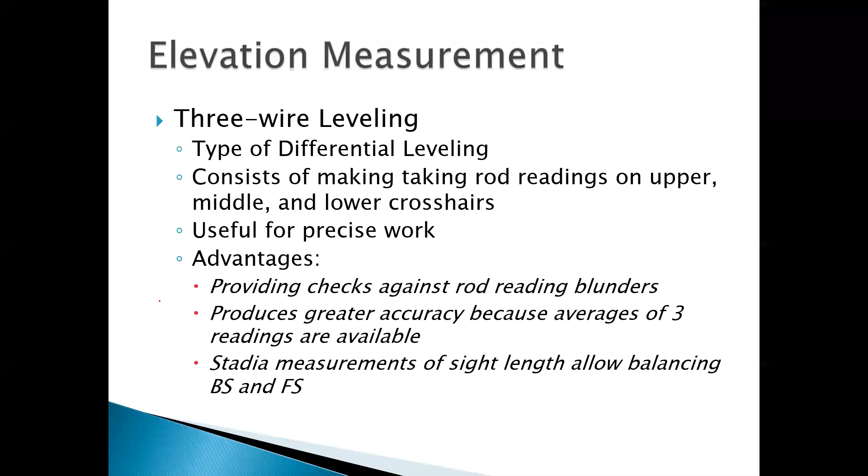So it's not perfect, but we used to use this process called stadia for doing distances all the time. Nobody uses it anymore because now everything's EDM based. Okay, so again, here's that equation. Upper plus your middle plus your lower divided by 3 should agree with your actual middle reading. And again, your upper reading minus your lower reading times your stadia constant, which in the United States is usually 100. That tells you you're 100 feet.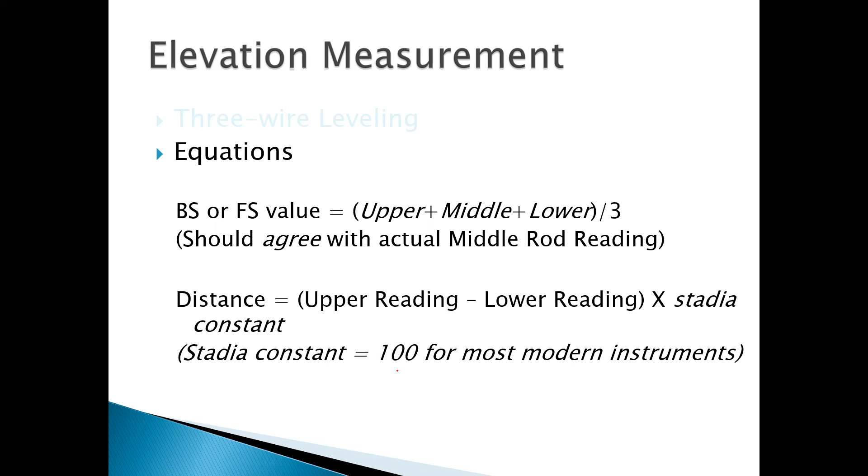Okay, trig leveling. We'll just do this, and I'll probably go ahead and finish that for today. This is a technique that gives you an indirect measurement of elevation. So instead of actually measuring elevation, you're measuring other things. And primarily what you're going to be measuring is a slope distance. You're going to be measuring a vertical angle, usually a zenith angle.

You've got to measure an HI of the instrument, and you've got to measure a rod height. So there's a lot of things you're measuring just to get an elevation. So it's not as good as differential leveling. But what's nice about it is it gives you quick results, especially for large elevation changes.

So in the early days, when they wanted to know the height of a mountain, they would do it trigonometrically, because to run differential levels up a mountain and down a mountain would take maybe weeks, maybe a month. So it's a lot quicker, a lot easier if you use trigonometric leveling.

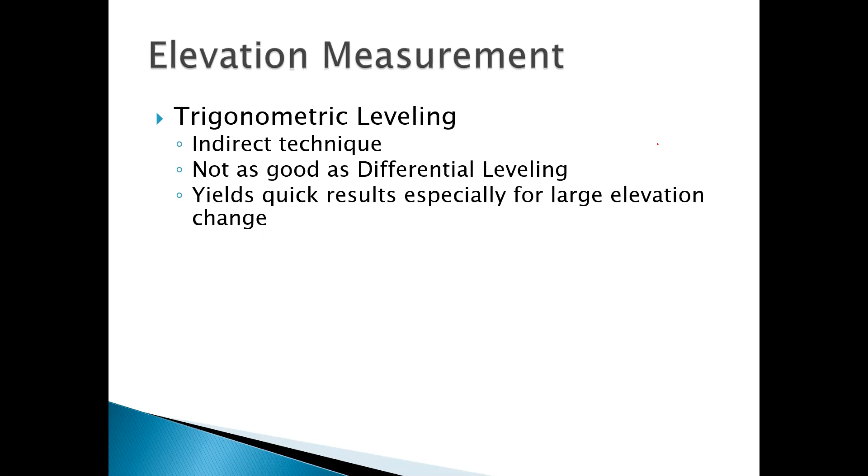So there are some equations. Your vertical distance, you've got to calculate that first. So you have to measure the slope distance, and you have to measure the zenith angle, and it'll calculate this. Now, when we're out with the total station, it's going to do that for you. It just spits that out. But keep in mind, what it's doing is a slope and a zenith.

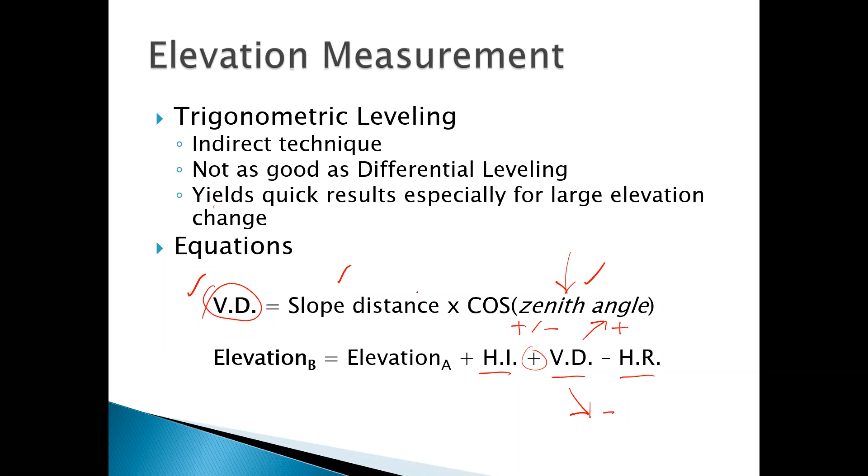To then get an elevation, you're going to take your HI that you measure, your vertical difference, and your rod, and you're going to add them algebraically. Now notice this is plus, and this is minus, but this actually could be plus or minus depending on whether you're looking uphill or downhill. If you're looking uphill, your vertical distance is plus. If you're looking downhill, your vertical distance is minus. If you're using a zenith angle, it's going to give you the proper sign, because it's like using an azimuth in that respect.

So let me show you how this works. With trigonometric leveling, I'm just going to do a graphical sketch here. But you're going to typically use a total station, tripod, reflector, prism pole. If you want to get more into some of the errors associated with EDMs, you would need a thermometer and a barometer. You would also need a folding rule, because that's going to be used to determine your HI and rod.

So let's take a look at a diagram. We'll probably use a little of this when we get out in the field. But we're going to, by and large, be using differential leveling, because it's a better method, especially for most types of construction. So here's kind of a schematic of what we're looking at.

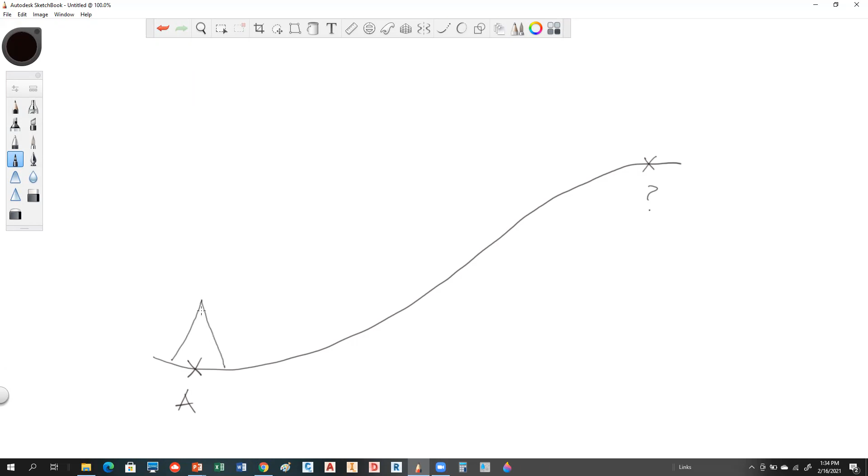So let's say we're going uphill like this, and we've got a point up here. We don't know its elevation. We do have an elevation down here. We'll call that A. So we have a good point of elevation there. So we're going to set up our instrument over top of that point. And what we have to do is measure this distance, which is referred to as my HI: the distance from the point we're sitting on to the optical center of the scope. On a total station, you usually see a little dot on the outside of the standards, and that's the point you're measuring to.

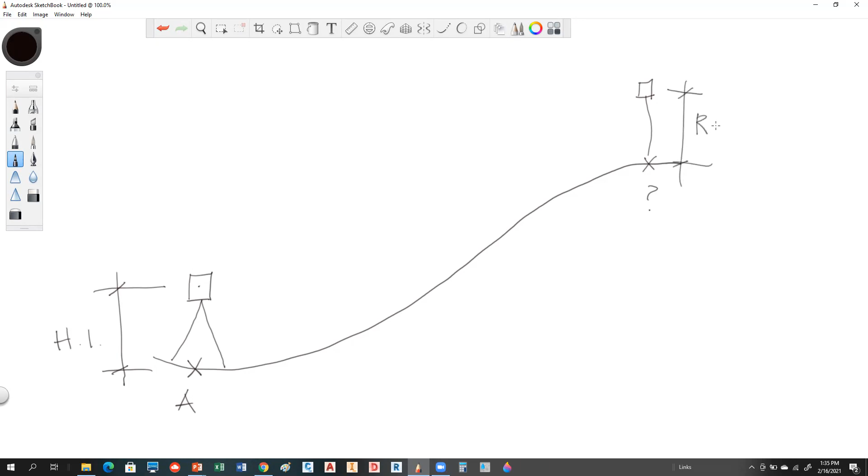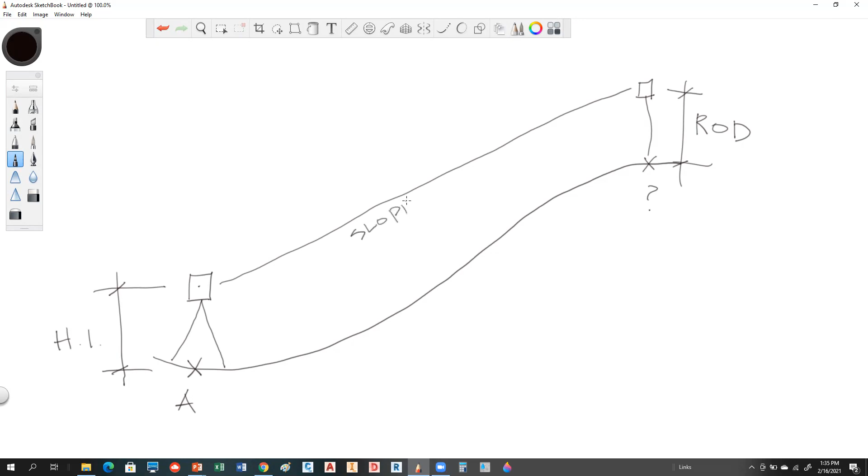We take a rod up here, a plumbing pole, hopefully not bent like that, and a reflector, and you measure this distance from the ground to the center of the reflector. That's what we refer to as the rod. You're shooting the slope distance, and you're measuring a zenith angle. So this is my zenith. And what it allows us to do is, if we know this elevation, we can calculate this distance right here. This is my vertical distance.

So if this is B up here, the elevation of B is going to be equal to the elevation of the point you're coming from, elevation of A, plus the HI. Then in this case, I'm looking uphill, so I'm going to have a plus vertical difference. That gets me from here to here to here. And in this case, notice the rod is going to be negative, and that would give me the elevation.

Now, if you look at this, there's a lot of sources of error here. I could measure the HI not very well. I could measure the rod not very well. I've got a slope error that could happen. I've got a zenith error that could happen. I've got a vertical difference calculation. So with all of these, there's a lot of plus or minus going on. So we don't necessarily want to use this for really precise work. A lot of people out in the field use it, though, because it's quick.

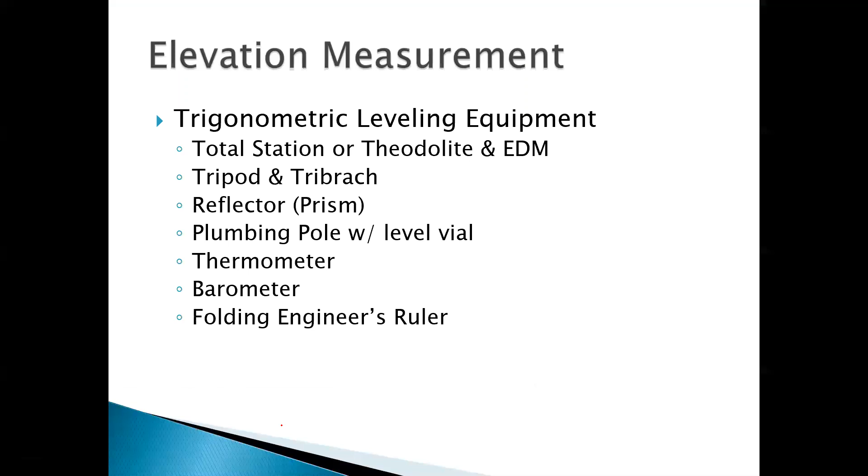Okay, so some sources of error, and then we'll stop here for the day. There are what we call curvature and refraction sources of error. So what happens is the curvature of the Earth creates an error because we're kind of looking at a horizontal line of sight, but when we hold our rod out there, you're getting a curved surface. So there's an error based on distance.

Refraction also, what happens is the light rays bend the horizontal line of sight down. So what's happening is it actually corrects to some point the effect of your curvature. So this can be pretty significant, and this kind of corrects it. So we have what's called a combined effect, right?

In general, you don't have to worry about any of these because unless you're shooting distances over 1,000 feet, you're not even going to see this for the most part. And also, if you are keeping your back sights and your foresights balanced, these just cancel out, okay? So we don't worry about it because the levels that we're using, you can't push them much more than about 300 feet. You won't even be able to read your rod beyond 300 feet.

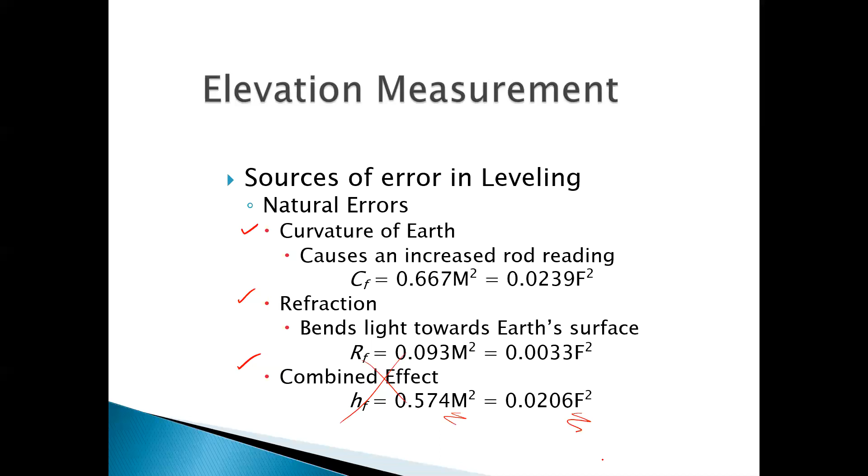And if you calculate these things using 300 feet, these errors are so significantly small. This M, I believe, is in kilometers, and that's in thousands of feet. So by the time you take those numbers and calculate them, they're really, really small. So we don't worry about this, but if you're doing really, really long lines, precise leveling, a lot of those guys would consider that.

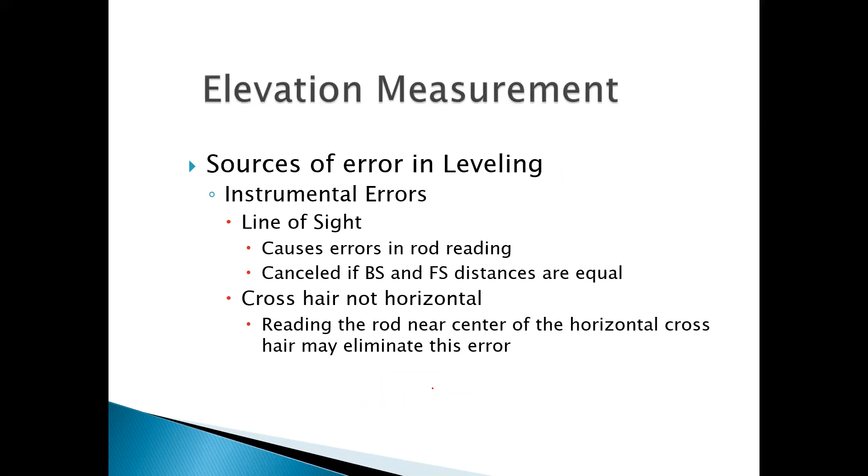Couple other things that are important with leveling. Line of sight errors. A line of sight error will cause an error in the rod reading. Okay. Again, that can be canceled by keeping your back sight and foresight distances equal. If your crosshair is not horizontal, that would be due to the instrument itself. That just means it probably needs to be adjusted. So hopefully that doesn't happen.

Error in leveling it. If you don't get your bubble perfectly centered, it's not really that big of a deal, but if it's a lot out, then you're not really getting a good number. Parallax, I talked about that the other day. You have to focus not only your distance, but you have to focus the crosshair itself. Without that, you have parallax, and a total station will also give you parallax.

So those are the big sources of error. Probably going to be faulty rod readings and recording notes. Not so much leveling it out because the bubble is easy to center.